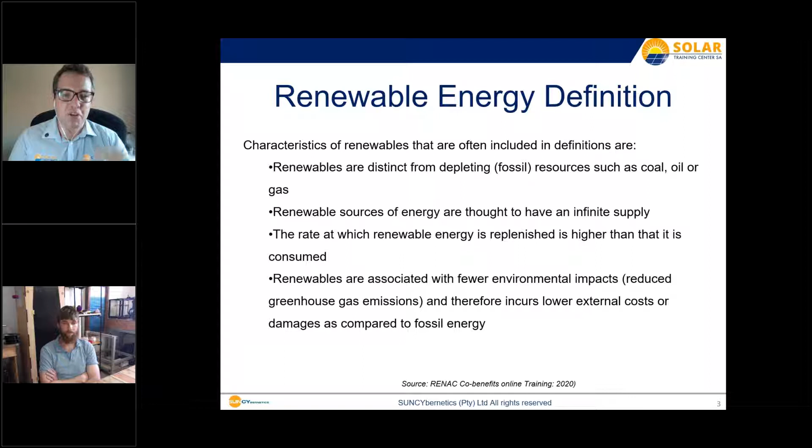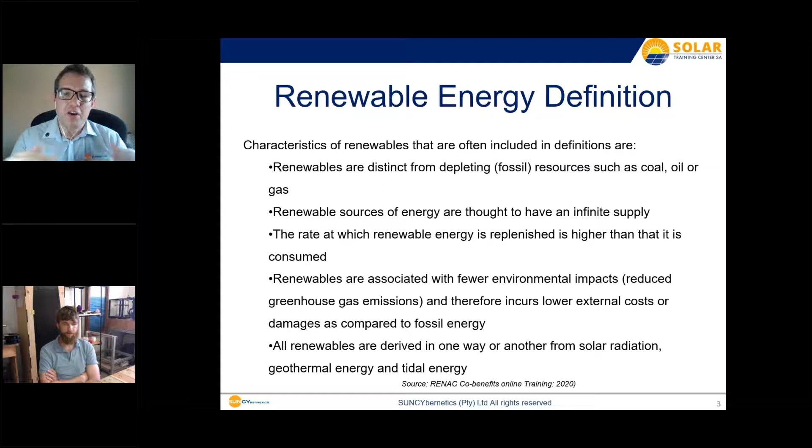And the renewables are associated with fewer environmental impacts. So it has reduced greenhouse gas emissions and therefore incurs lower external costs or damages as compared to fossil energy. And then all renewables are derived in one way or another from solar radiation, geothermal energy, and tidal energy. So you can see there's not a universal definition of what renewable energy is, but somewhere between these definitions, we have a common ground to understand where renewable energy would fit in.

These are the systems installed on distribution level. So that's in municipalities, on your roof, on the business roof. So there's really an indication of planning to have a very big section of renewable energy. And just to give you an idea, we've already got about 10 gigawatts worth of renewables installed, and we're looking at an additional 2,000 megawatts of renewables being installed in the next few years.

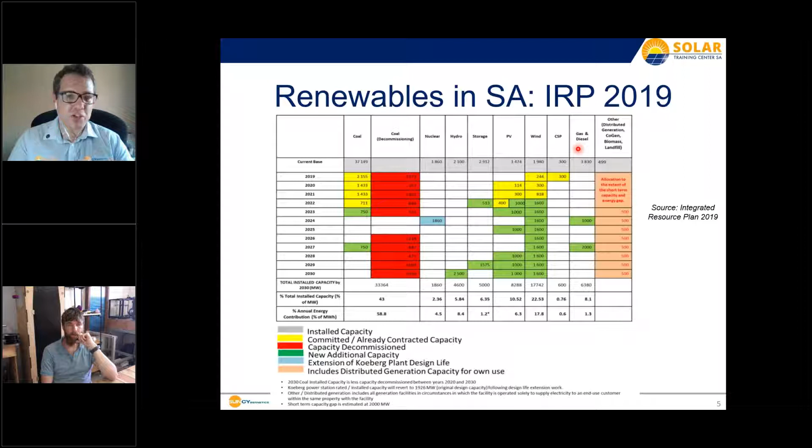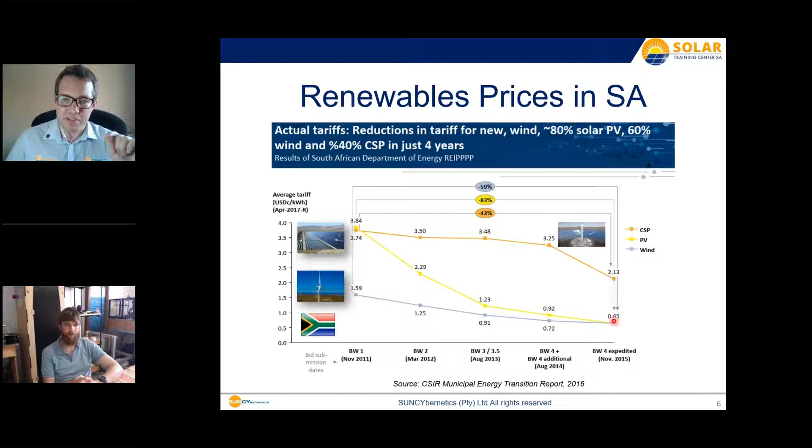If we look at pricing between solar, wind, and CSP, we'll see that there's a drastic reduction in cost of generation of electricity, especially for solar and wind. CSP also has a bit of a reduction, but that's also why you'll see that there's not much CSP allocation in the IRP going forward, purely because of the cost competitiveness that we are getting from other forms of technologies.

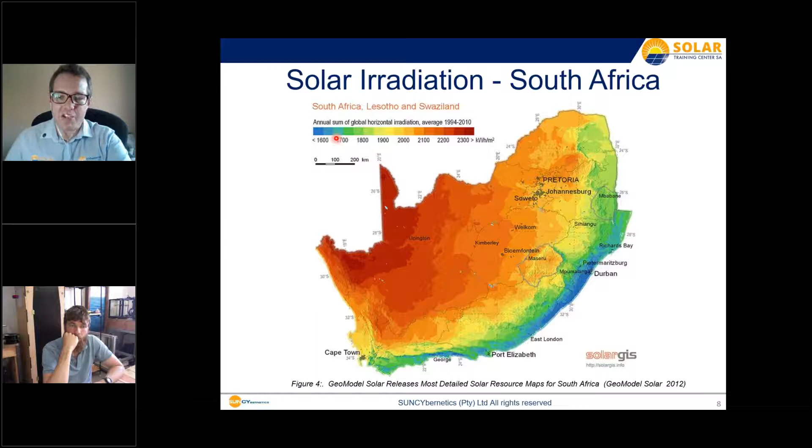And even if we compare our country to a country like Germany, you'll see that their highest values of 1,300 are still less than the 1,600 minimum that we've got in South Africa. So we have a lot of resources available in our country which we're not fully utilizing, whereas countries like Germany have installed more than 40 gigawatts of solar PV. And they don't understand why we're not using the opportunities or resources in our country.

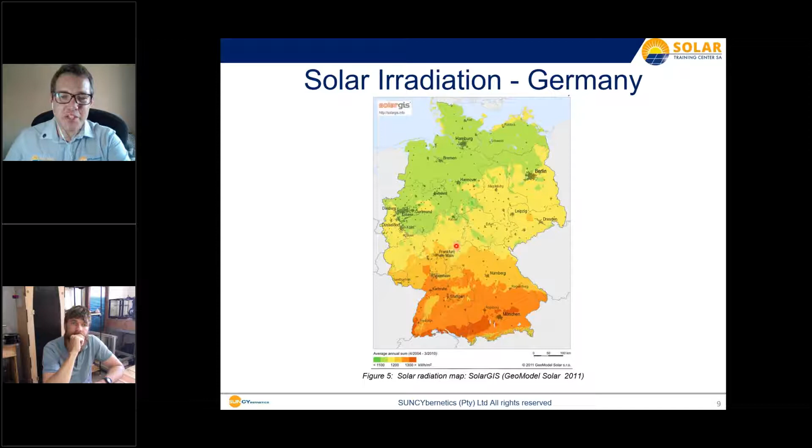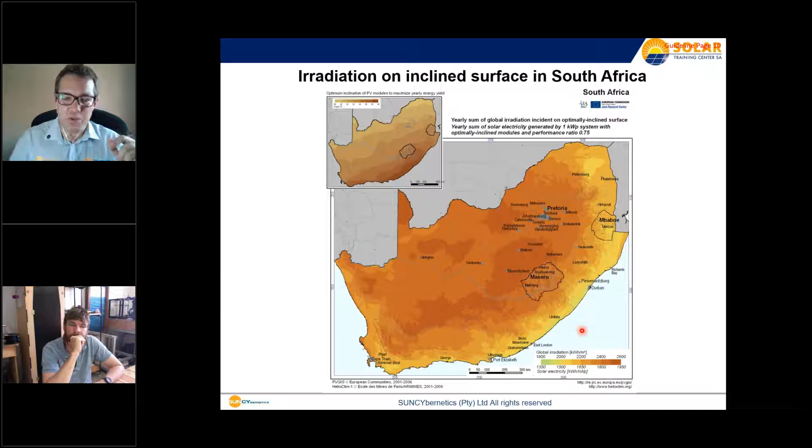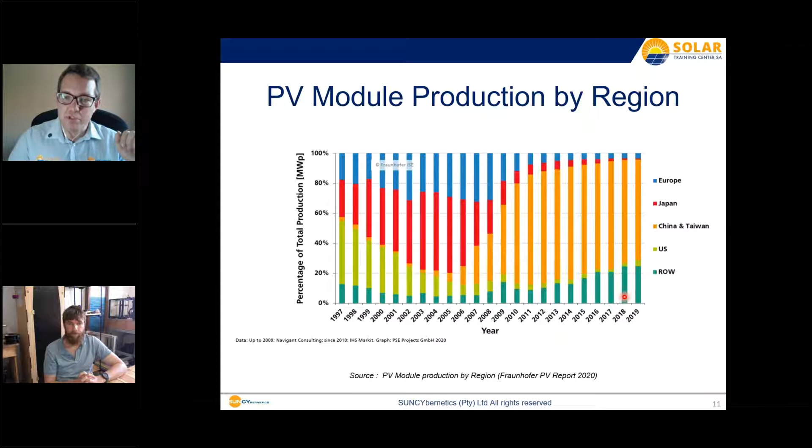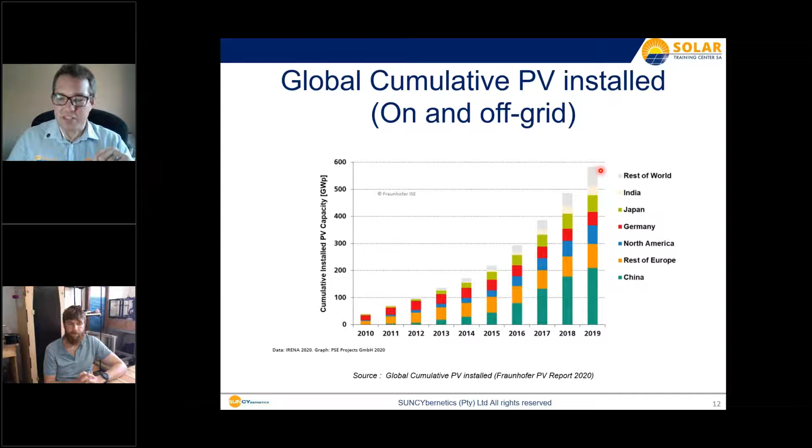If we look at the global cumulative PV installed over the years, you will see that there's a gradual increase going forward. And South Africa is only taking a small slice of the rest of the world, just showing you that the growth and opportunity for Africa and South Africa is still very large.

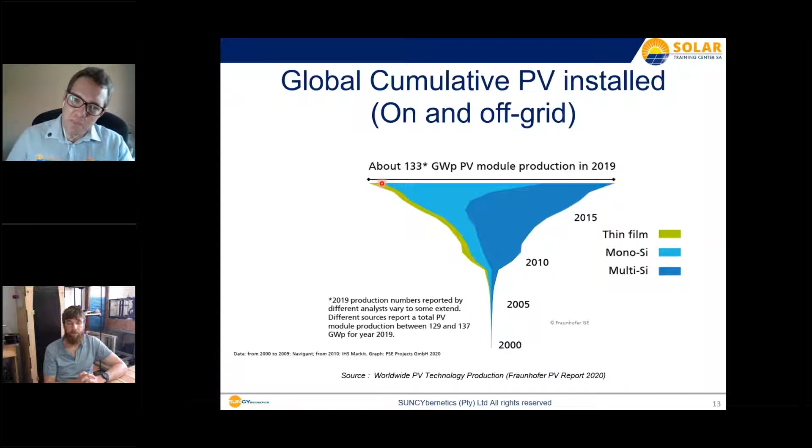If we look at the three main types of technology that's being installed worldwide, it's thin film, mono, and multicrystalline. You'll see that multicrystalline did take the lead at some stage, but mono is gradually taking over compared to multicrystalline. This is due to reduction in cost and also the better performance and lower degradation you'll get with monocrystalline compared to multi. But we can see that there's a gradual growth, and thin film is also playing a smaller role worldwide.

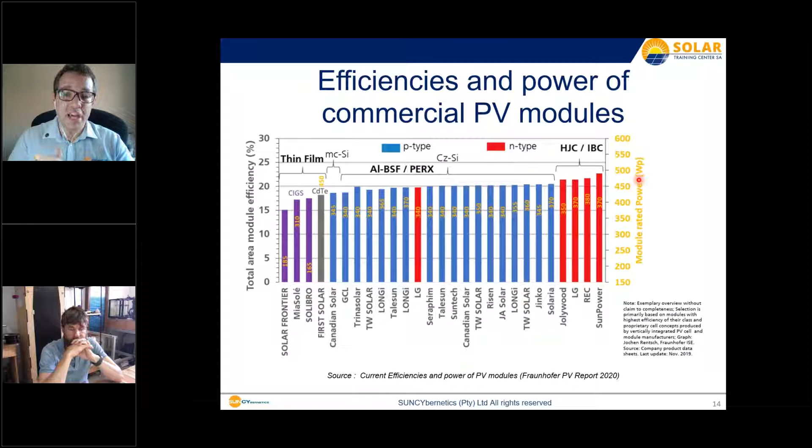We look at efficiencies. We'll see that solar PV's efficiency has increased quite significantly in the past few years. The highest efficiency is already going beyond 20%, and this is just for commercial PV modules. In laboratory conditions, you can even go up to 40% plus. I see the highest wattage rating here is about 500 watts. I've already seen solar PV panels rated at about 800 watts per panel. So we can see that the power output and the efficiency of these panels are increasing going forward. And we are seeing technology combinations where there's a possibility to achieve even higher efficiency than we already see in the market.

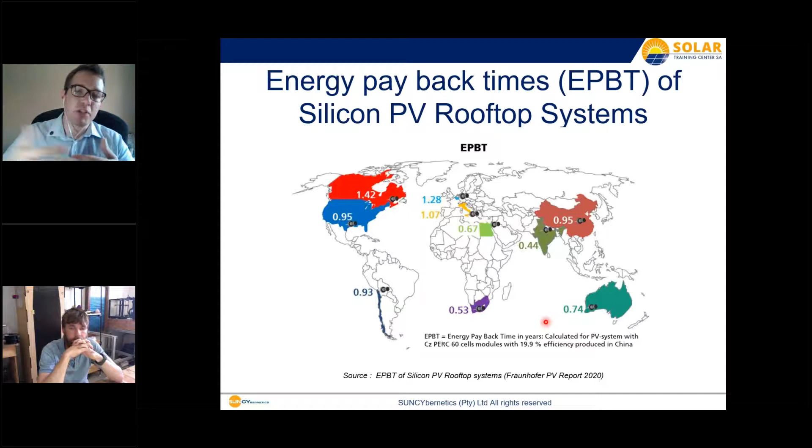If we look at the energy payback time, so just to understand what this means, you need energy to produce the PV panel. You need energy to produce all the components needed for the solar system. And the question is, how long does it take before the energy produced from the solar system covers the energy that was needed initially? And if we look at the energy payback period between the different countries, even South Africa, we're looking at less than a year. In other words, if our solar PV system produces electricity for 1 year, it will pay back the energy required, not only to produce the modules, but all of the components. And that's great, because that's where you create more energy that was not there before.

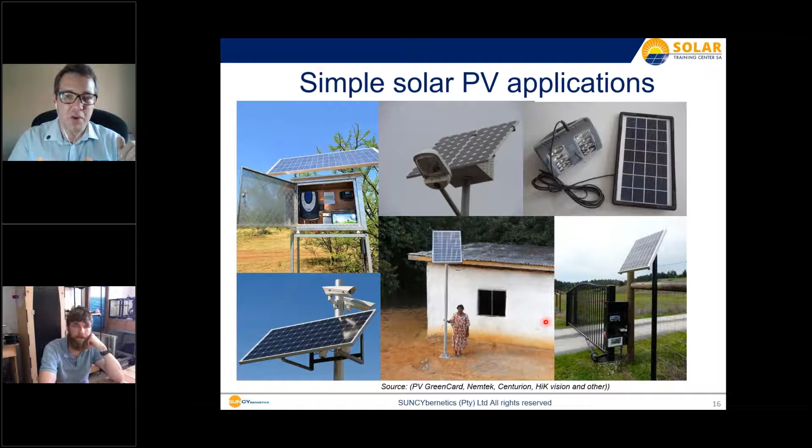Okay, we are fully aware of various simple solar PV applications that can be used. We see this all over the country, even in your residential area or the countryside. And then we're starting to say, okay, how can we integrate this even more in our society? So where it's used in products, where it's made part of tiles, we've seen these floating solar PV systems, so it's installed on top of the dam. It's forming part of structures, or even e-mobility. We spoke about solar roads. So there's various applications of how they try to integrate these technologies to fully harness the energy we could get from the sun.

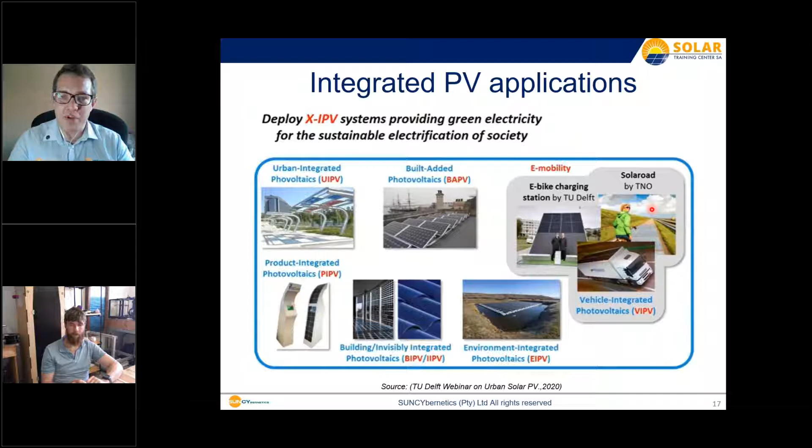Most of the solar systems installed in South Africa in the previous years were grid-tied, especially if you think about your Makros or your shopping centers, because it made financial sense, and the payback periods for these systems were quite short.

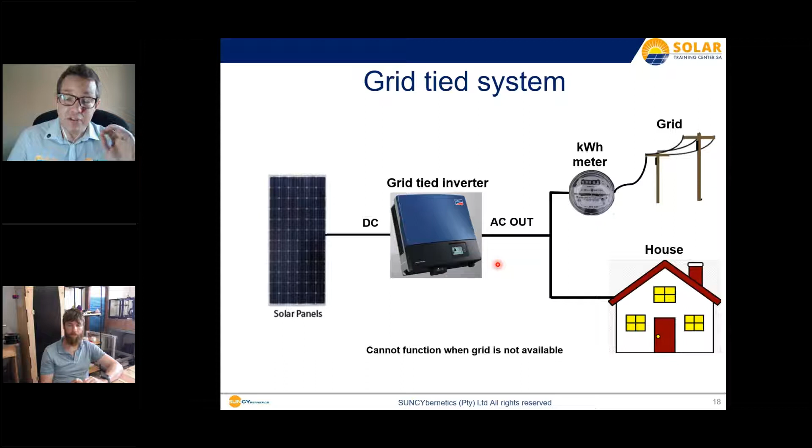We're talking about anything from 3 to 6 years, and then it's paid off. As soon as you add batteries, then it becomes quite expensive, and the financial starts to become difficult to justify. Keep in mind, if the grid is off, then the system would not work. So it would switch off. So the main purpose for this system is to supplement your power supply and reduce your power bill. That's why you would install such a system like this.

And just to show you practically how that would look like, the blue line is the typical load profile for a factory, and the green line is then the grid-tied system. So whatever is under the green line is then the energy offset by the solar system, which would reduce your bill from the municipal or Eskom side.

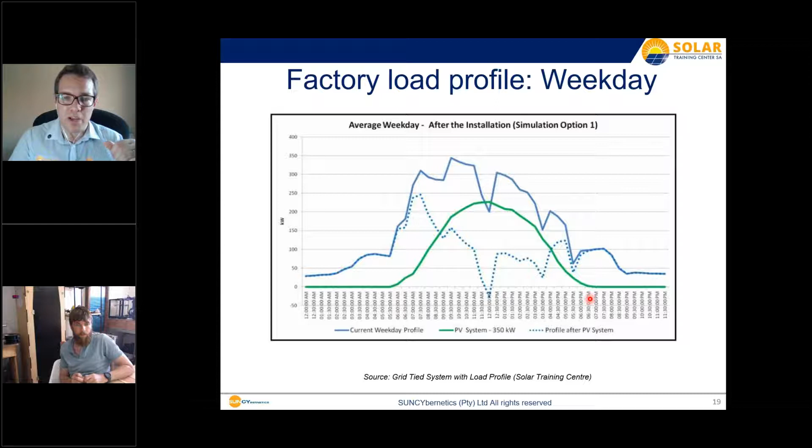So here's a hybrid or island system. I'm of the view that a lot of the systems that are being installed now would look something like this, where your PV is DC coupled. In other words, the solar injects its power on the battery side or the DC side of the system. And it gives you then the power supply that if Eskom goes down or there's load shedding, you still would be able to supply electricity from your battery system or from your solar system.

You would then, in this context, use the utility to supplement your supply. So in general, we see a lot of systems like that. So it's not a case of people going off the grid, but they combine the grid supply with solar and some form of batteries for backup supply.

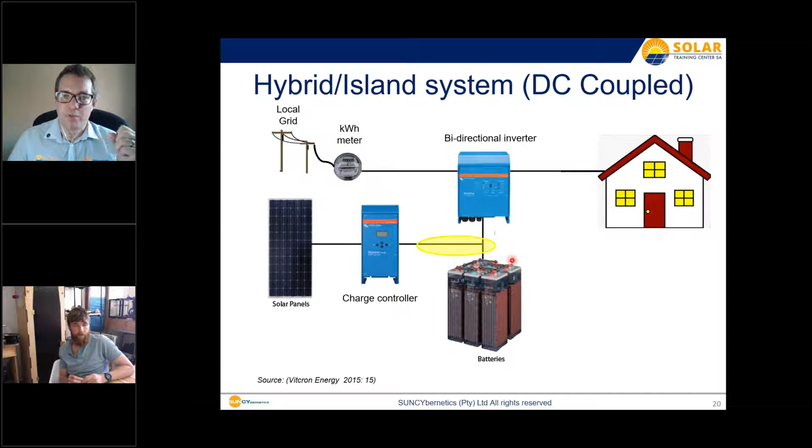Okay, in energy storage options in Africa, there's mainly the following 4 things to consider when buying batteries. It's the cost, the life cycle, the maintenance that's required, and the efficiency. And I want to highlight efficiency because lithium ion compared to lead acid is much more efficient. So you can actually get away with a much smaller system compared to lead acid. So those are the 4 factors you need to consider when buying a battery.

So the main technology used in South Africa is lead acid. We started off with lead acid. It's the proven technology that's been used all over the years. But in certain contexts, it becomes obsolete. So we need to consider other technologies like lithium ion. So this could be new or second life. Second life means that the batteries were used maybe for EVs overseas. It still has some good capacity to use in the solar sphere. And a lot of the second life batteries we will see coming into the market for a lower price that can be used for solar.

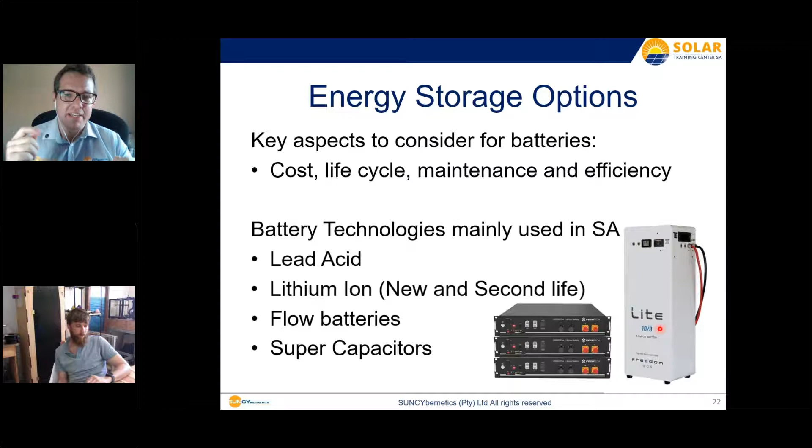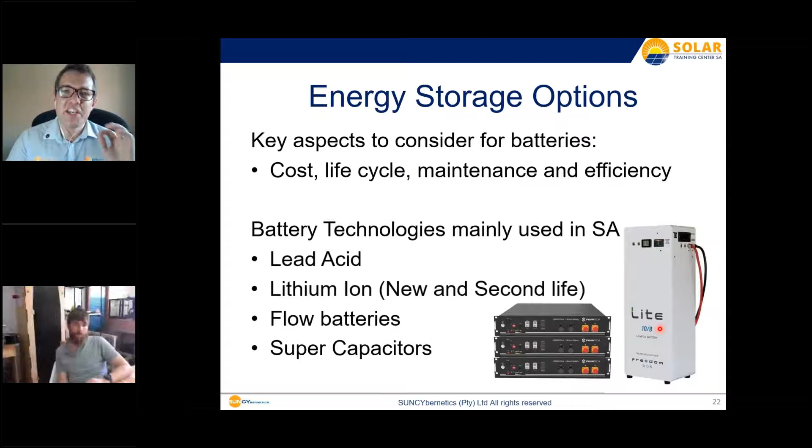On paper, it seems very good because it has an enhanced lifetime expectancy. But the guys that are in the field say that if you look at it closer, it's actually a combination of supercapacitors and a very advanced lithium ion combination. So it is a good option to consider, but it's still a new technology that needs to prove itself going forward. Okay, so that is in a nutshell what I want to talk about on the solar side.

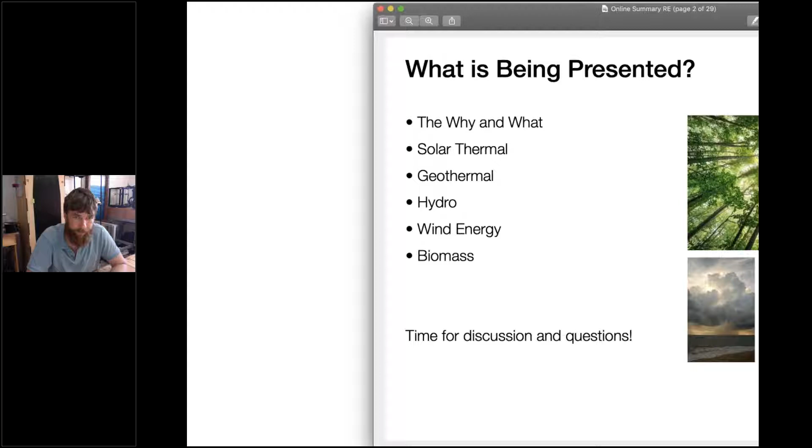Sean, is it possible you could just move the presentation to the center of the screen? I don't know if it's only me that's seeing it on the side. Oh, is it? Are you seeing my whole screen? Yes. Joseph, you can also just maybe confirm. Yeah, I'm only seeing half the presentation. Now, could you make it a little bit smaller? The presentation smaller. Yeah, to put in the middle. Oh, I see. Sorry, I see there. I don't know why. Okay, I'm trying to make it fit to that. Yes, that could work. Okay, is it fitting in there now? Thank you, Sean. Okay. Okay, sorry about that.

Okay, so the what and the why, kind of similar to what Faure has covered already. We'll touch on solar thermal, geothermal, hydro, wind energy, and then biomass. And then I'm hoping guys will have some questions on these various topics. Okay, so firstly, what is sustainability? And I just copy and pasted this definition there from Wikipedia.

Sustainability is the ability to exist constantly. So in the 21st century, it refers generally to the capacity for the biosphere and human civilization to coexist. So whatever we're doing, we need to make sure that this relationship with the biosphere is going to last indefinitely. And if we continue to burn fossil fuels the way we are doing it now, we are not going to be in a sustainable biosphere, and things are going to turn for the worst.

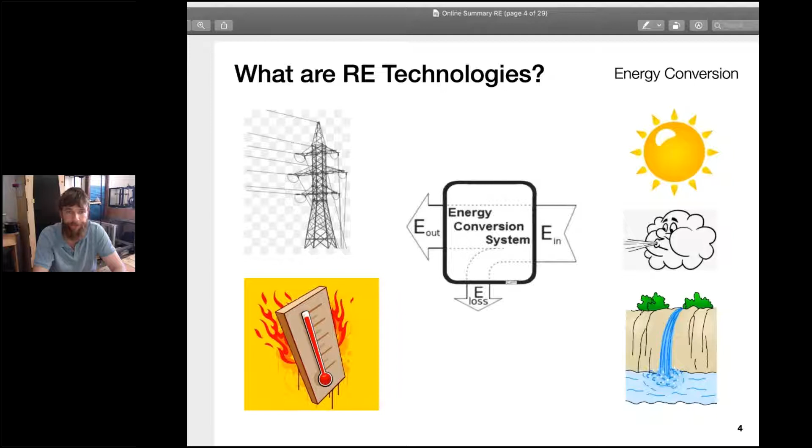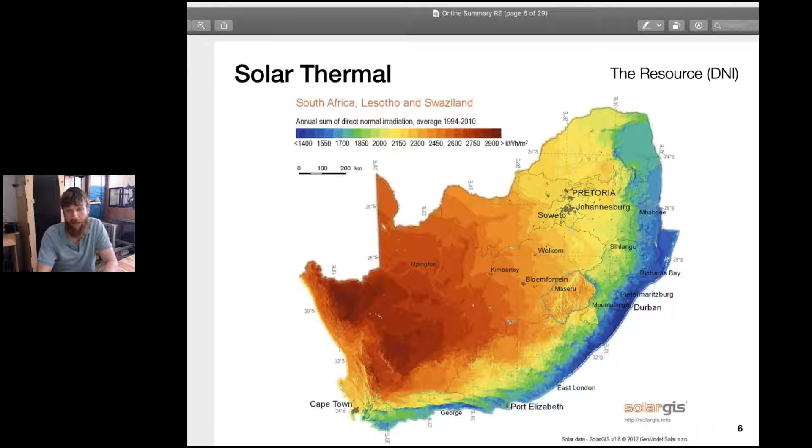So if there's a slight mist or a bit of cloud cover or haze, and you lose that direct light, you don't actually have any rays to work with. And so you're measuring the sun's energy in a slightly different way. When you are dealing with solar thermal, you are looking at direct normal irradiation. If you are dealing with PV, you're normally looking at global horizontal irradiation. So there can be slight differences between maps that look fairly similar, and that may be a reason as to why they are different. So here's a couple of pictures, and I can't seem to get my marker up, doesn't matter.

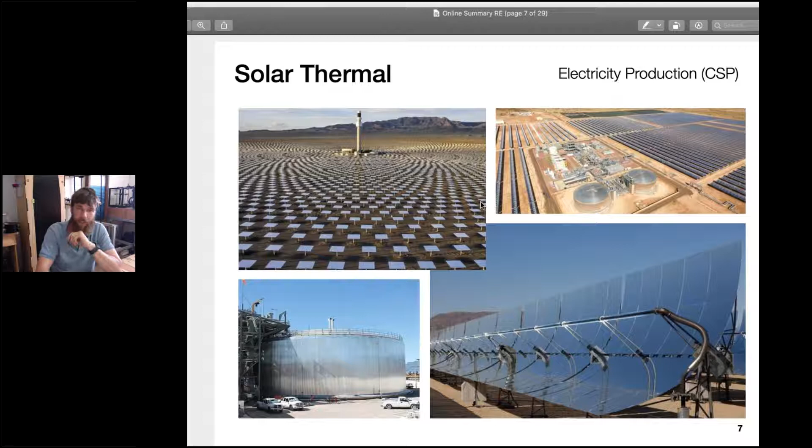Another option for hot water heating may be to go PV direct, and I have this at my home here. You use the energy coming from the PV panels, and then you dump that into an element in your geyser, and you create your hot water like that.

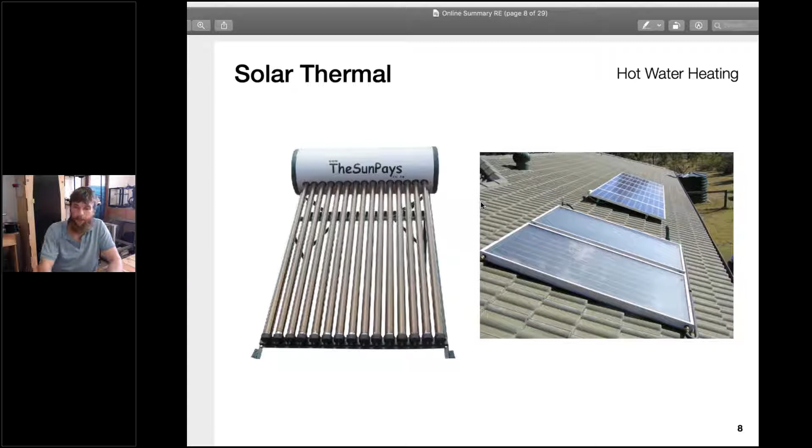and fairly cost-effective way. And I mean, I don't think I've ever seen this in South Africa as an example on a building, but I've seen many pictures of overseas. So this is definitely, I think, something we could utilize more in South Africa.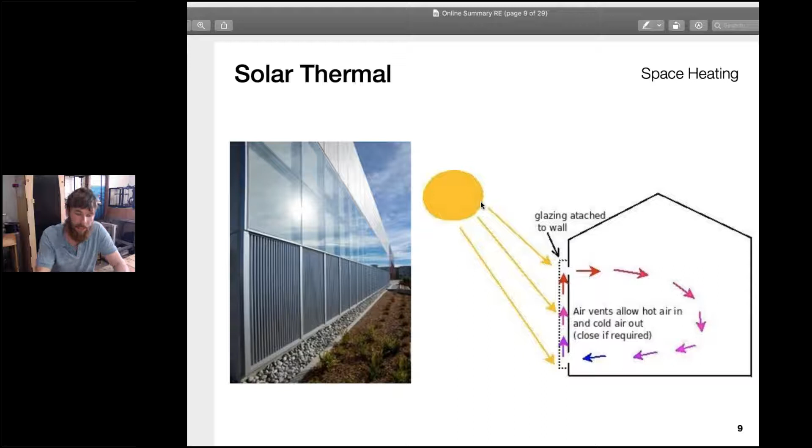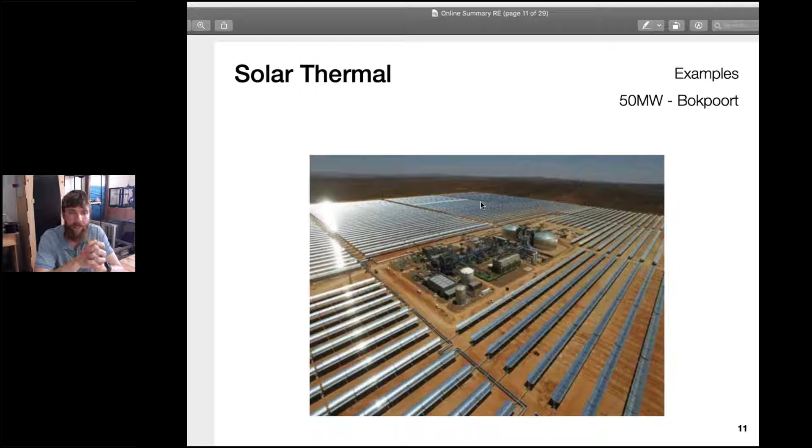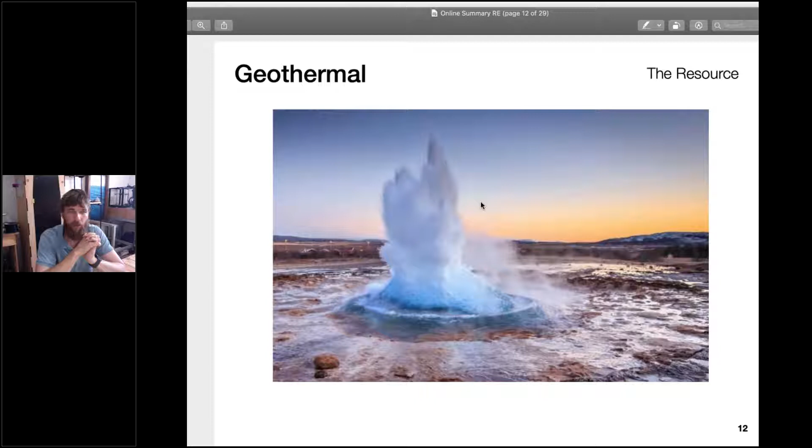Okay, on to geothermal. So again, the direct or the most obvious geothermal resource is some sort of lava or heat from underground, but there are many other geothermal resources that can be used, and we will go into that. So firstly, we can use that heat underground to heat up water. We can then pump that water or extract it out of the ground, and we can transfer that heat to steam, or sometimes we can even use the steam directly from the ground. But in the end, we run a steam turbine, much as in a coal-fired power station, and we produce electricity that way.

The great thing about this type of renewable energy resource is that we're producing electricity 24/7, because when the sun goes down or the weather changes, you're not changing at all the temperature underground, and so you can constantly extract heat from underground.

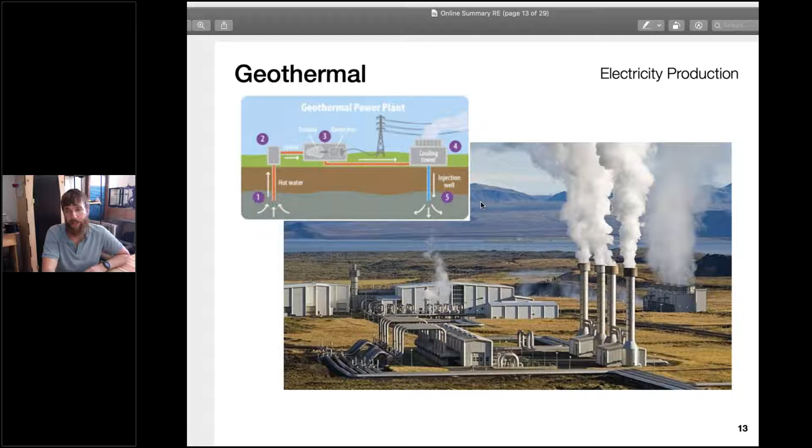Sorry, going back there, South Africa, we don't have this type of resource. Mainly in Africa, it would be Kenya. In California, they've got a lot of this. Iceland, they've got a lot of this. So not really applicable to South Africa, but I just put it in here to show that you can produce electricity from geothermal. Here's something which applies very well to South Africa, using a ground source heat pump.

So generally when we have an aircon in our office, what that aircon is trying to do is get rid of heat on the outside of the building and absorb heat from the inside of the building and therefore cool the building down. And if the outside is hot, it's very difficult to dump heat into a hot environment.

So an easier way of doing that is you run your piping or your cooling pipes underground, which makes it much easier to dump that heat from your air conditioner or your heat pump into the ground, and therefore increasing the effectiveness of your air conditioning system. The reverse is also true.

Using a heat pump, you could also absorb heat from underground. So if you were in a very cold place where it was snowing, you could use a heat pump, and instead of trying to absorb heat from a cold, snowy environment, you would then be absorbing heat from underground. So this is a great application.

I've seen this at the Verde Hotel in Cape Town at the airport there. They've got kilometers worth of pipe underground, and they use this for their heat pump systems, which heats water and cools water. And I'm not exactly sure what they do with it. I think it's for the air conditioning, stuff like that.

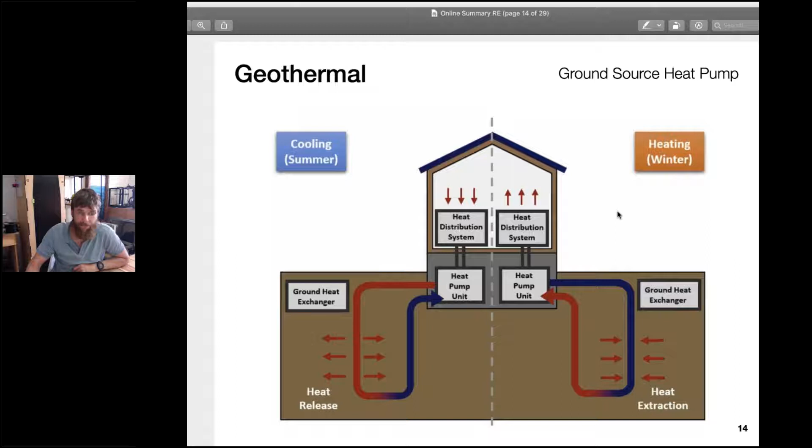Another example here is using earth cooling, which is again very simple, but I've never seen this done as a practical example. You essentially have an inlet pipe which pulls air into your building, and you would know on a hot day you dig a hole a couple foot under the ground, and generally the soil is quite cool. And so you're using that to your advantage.

So you run piping underneath the soil, maybe a meter down, and before that air manages to get into your building, it is cooled down by the mass of soil, and you have cool air getting pulled into your building. So either you could use this directly just with a computer fan, and you're drawing cool air into your building, or you can run that into an aircon unit, which would then cool it even further. So very simple, can be very cost effective, and your energy requirement can be just tens of watts running a small fan.

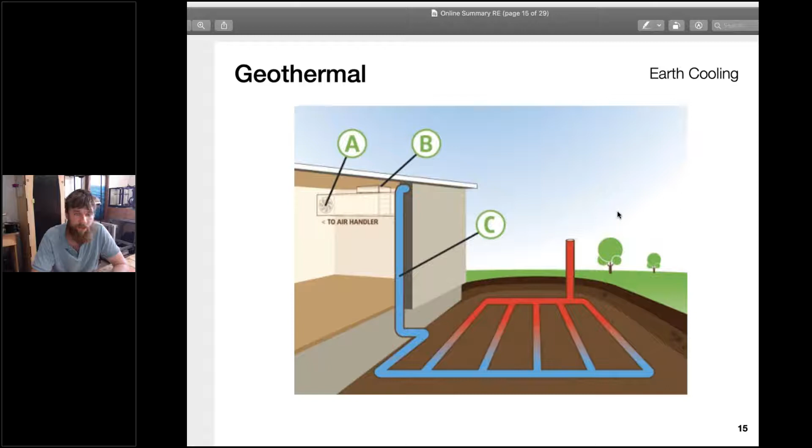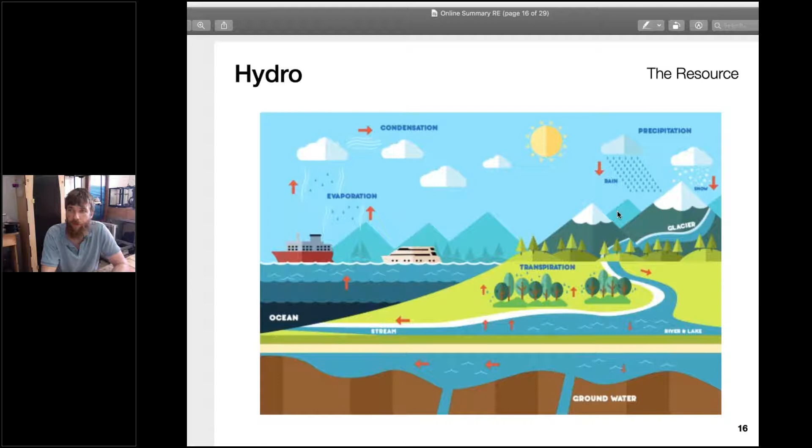Okay, on to hydro. So there's a little bit of the hydrologic cycle where the water is evaporated off the ocean, and it is condensed into clouds. Then precipitation happens at a high elevation. And now we have water that's at a high elevation, which we can then use to our advantage. That potential energy, we can use that to run devices to produce mechanical energy or also produce electricity.

And if you were very lucky to have a farm or something that has a stream running through it with a little bit of an elevation drop, you could get 24/7 power from that stream. So I would say, in my opinion, this is kind of the holy grail of renewable energy. But obviously not very common compared to something like solar PV, where everyone is going to have sun shining onto their house.

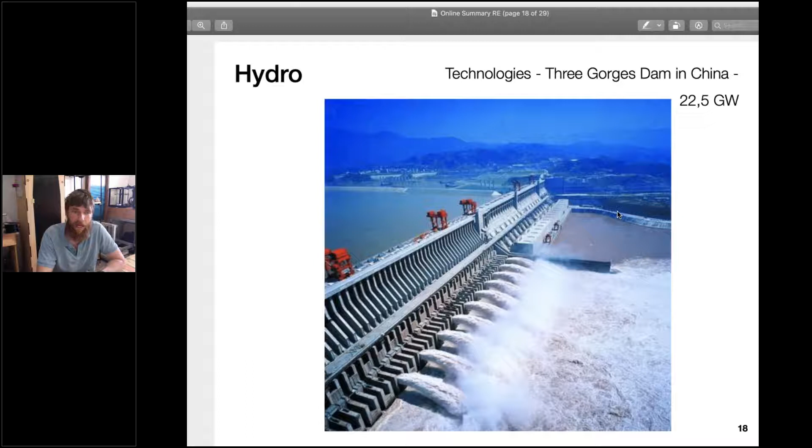But that is the other end of the scale, and also very cost effective. So we do see this in South Africa, not to this scale, but we do have a couple of hydropower plants, and we also use it for storage, where we pump the water into the dam when we have excess power, and we draw on that power through the turbines when we need it.

Just a quick calculation there. So your two key things there being your flow rate and your height. So if you're considering installing hydro at a site, you've got to have a big head or height drop, and you need to have a high flow rate to get a good amount of power coming out.

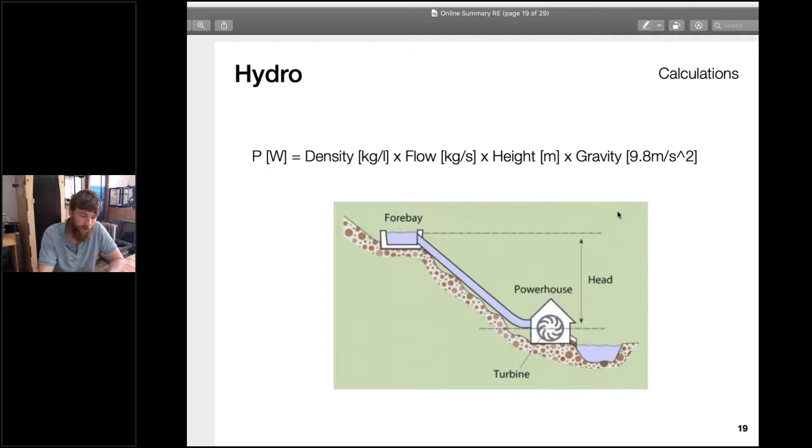On to wind energy, again focusing as always on the resource first. You can see South Africa has very good wind resources across the country. There was a study done by the CSIR where they considered putting low wind speed wind turbines in low wind speed locations and high wind speed turbines in high wind speed locations, and the amount of potential across the country is just vast. So it is really an untapped resource, and we are very privileged to have both really good solar resources and really good wind resources in South Africa.

And so technically we could have the cheapest electricity in the world because renewables are becoming the cheapest technology to run, and we have the best resources. So we would get the most out of those technologies.

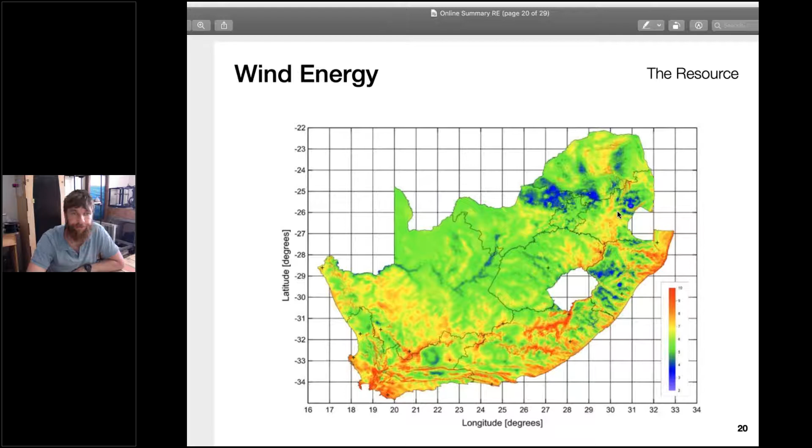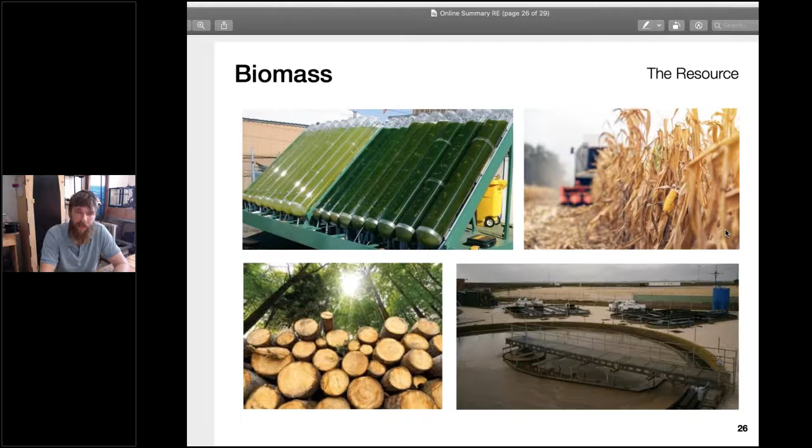So the renewable cycle there is a little bit more complex. And the question is, we're burning wood, for example, and we're emitting CO2 into the atmosphere. How does this make it sustainable? It makes it sustainable if we are planting those trees to reabsorb that CO2 we've just emitted into the atmosphere. And so we sequester that CO2, we store it back into the trees. And so this closed loop cycle should hopefully have a zero net effect on the atmosphere in terms of CO2 emissions.

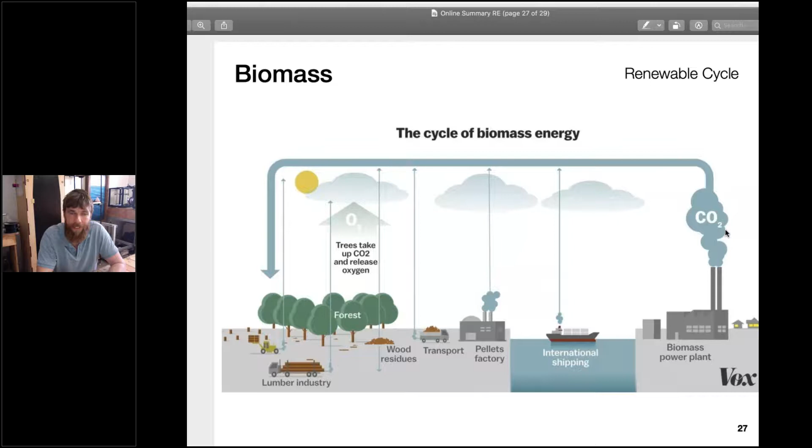Generally, with the transport, for example, we're not burning a biofuel, we're burning petrol or diesel, and so we are emitting slightly more CO2 into the atmosphere than what we are absorbing. But ideally, you want a net zero system.